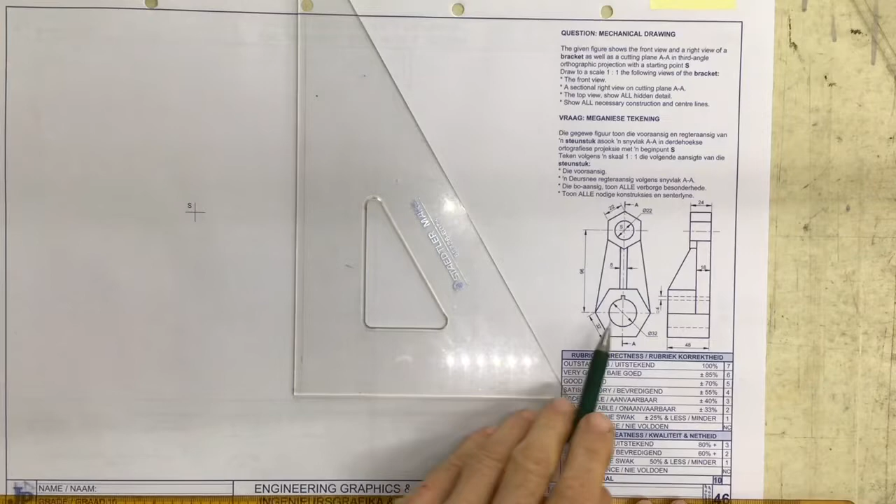We're going to draw the third angle orthographic projection. They've given me a front view and a right view, and they're asking me for a front view, a sectional right view, and a top view showing all the hidden detail.

To start with, always start with the views that have the hexagons and the circles, and then you can project across very easily. So I start out with this circle over here. Let's just draw that in.

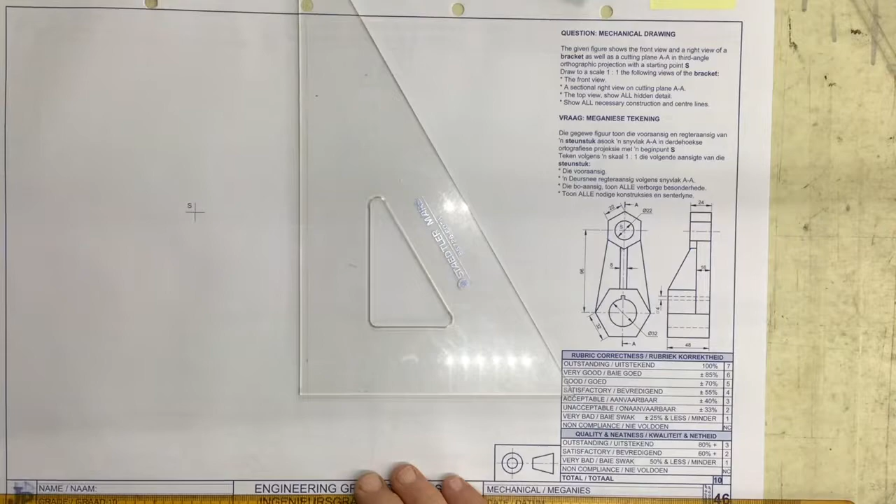It says it's got a diameter of 22. You've got a decent circle stencil. Find that 22 on the decent circle stencil.

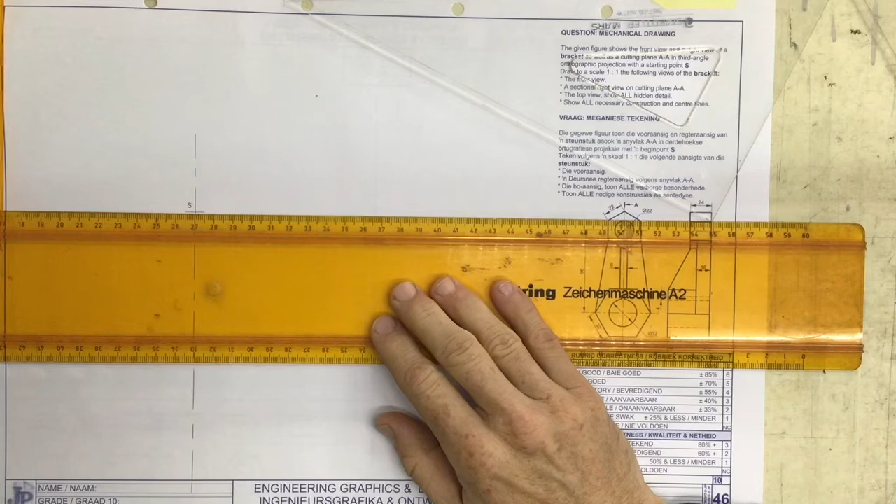You're going to draw in some center lines to start with: long dash, short dash, repeating across. And you're going to come up here to that point S and draw the same long dash, short dash pattern going across there.

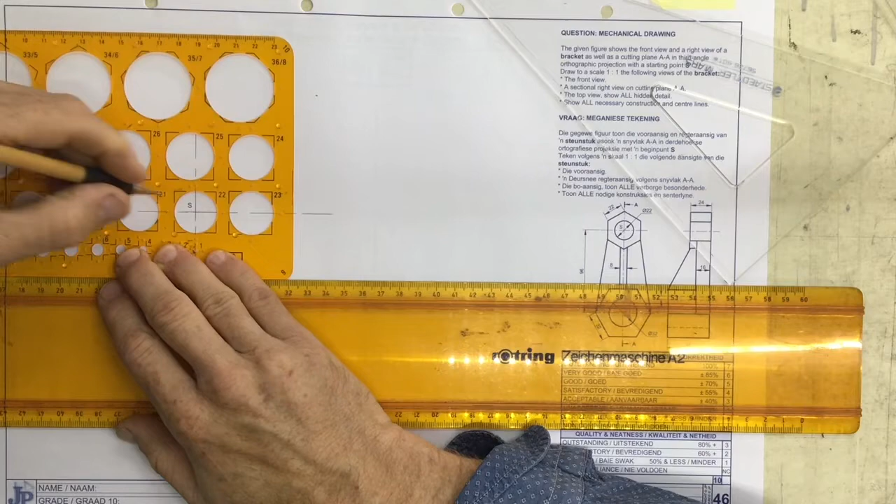You can take your circle stencil now with a diameter of 22, line it up on the center lines, and draw that in very nice and dark straight away. There's 22, and there we go. Circle done.

Right, so the next thing we're going to do is draw that hexagon around there. It says it's got a side length of 22. So I take my pair of compasses, set them to a radius of 22, and draw a circle, just a construction line circle going around.

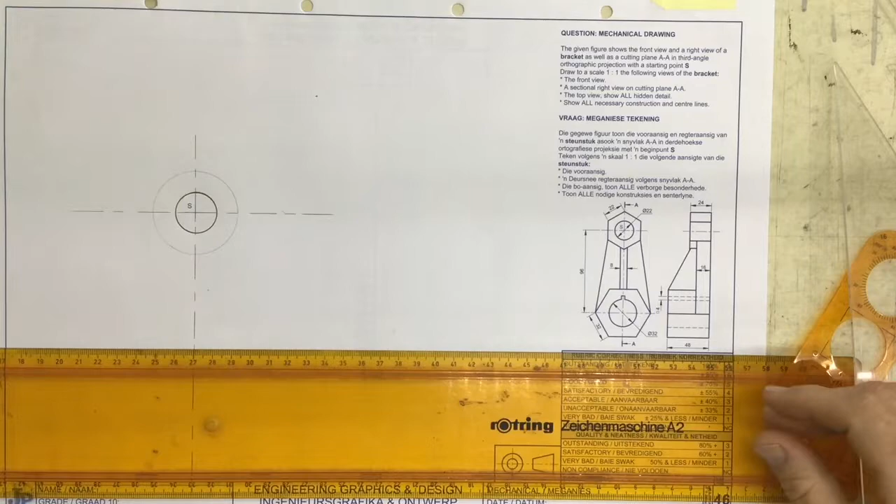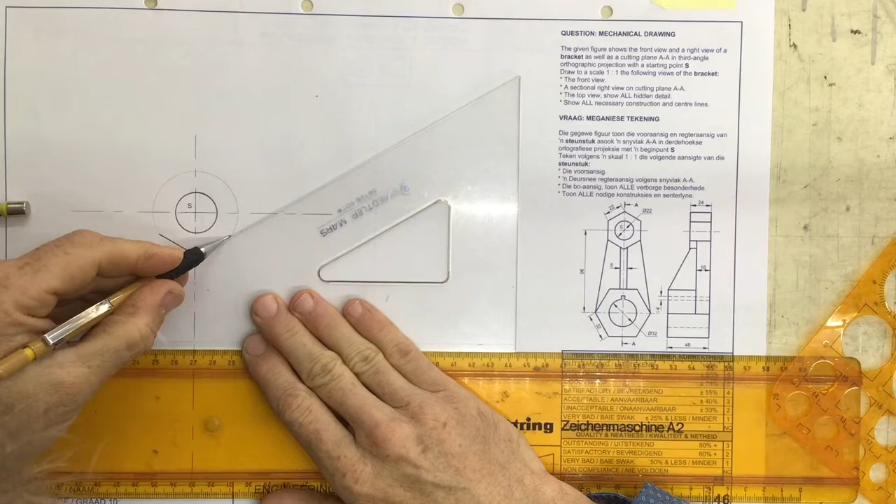Once I've got that in place, I take my 30-degree set square, go to that point where the center line is going through the circle, line the set square up there, draw a line coming across, swing it round, go in the opposite direction, go vertical up to the circle on both sides, and go up to the top, lining it up on that point there going up to the center line, and the same story in this direction.

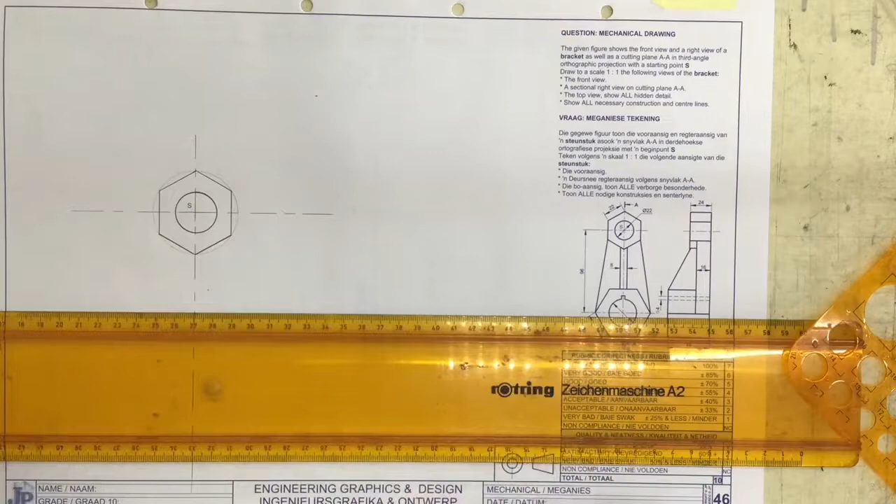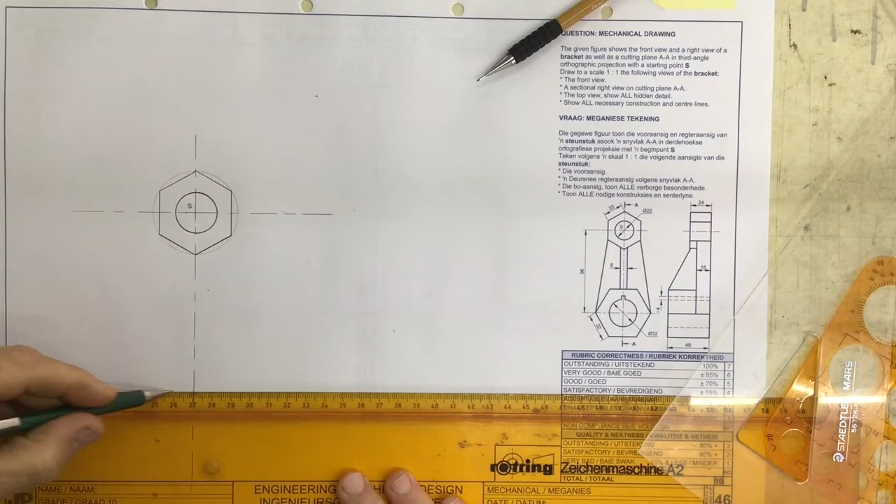I then need to figure out the distance between the center over here and there. That is 96. So I set my pair of dividers to 96 millimeters, come to the center, mark it off over there, and draw your center line going across: long dash, short dash, repeating across.

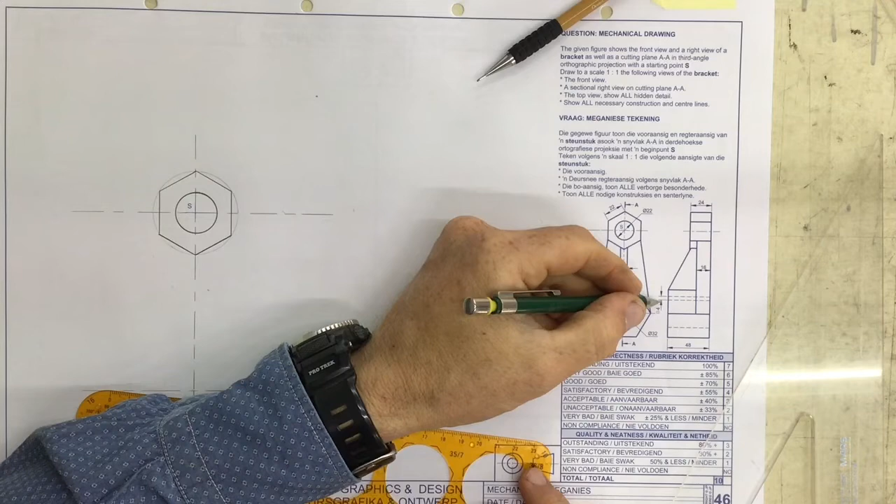I can now start by drawing this little circle over here. It says diameter of 32. Yes, I do have a 32 on my circle stencil. Note it has this little hiccup, which is a square keyway that I need to draw in.

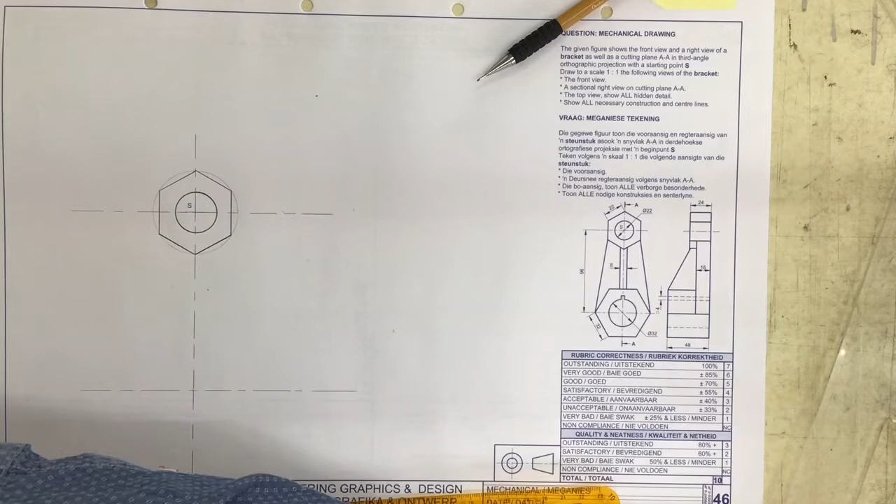So what I need to do is figure out where that keyway is going. It's going to go on top of that circle. I'm going to draw very lightly a construction line circle with my pair of compasses. 32, that would be 16. I'm going to go to that center over there and draw a light construction line circle going around.

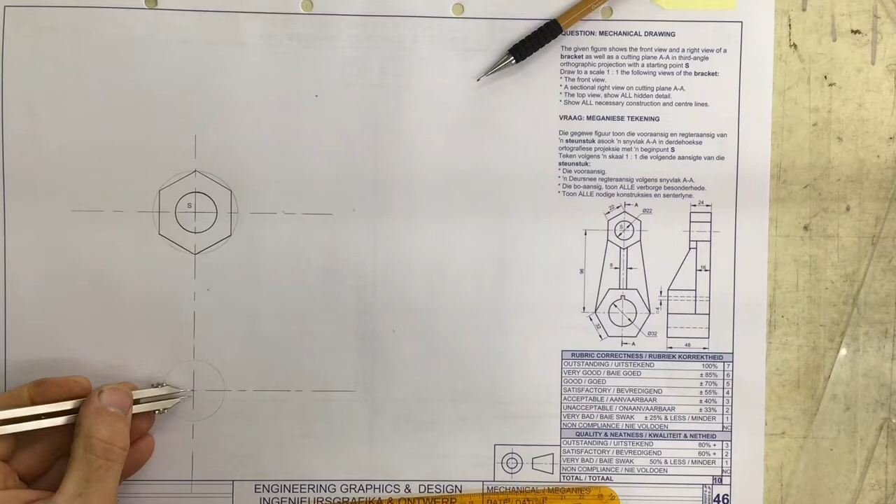I then need to measure off 4 millimeters, which would be at a 2 millimeter distance. I'm going to measure 2 millimeters over here, 2 millimeters going down. Sorry, that was a bit of a vicious thing. Okay, there we go. Take my set square.

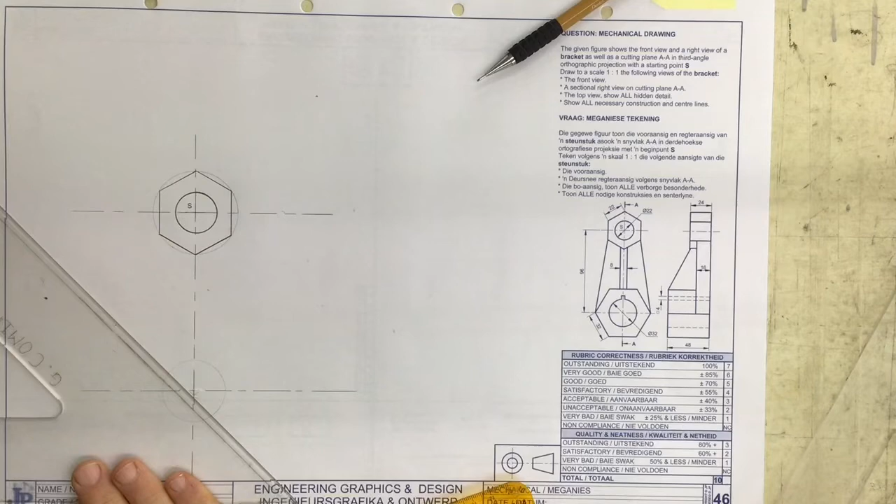I'm going to draw a little line going out at 45 degrees here, a little line going out at 45 degrees there, and then draw two lines going up, and you can see that you'll get that gap perfectly on either side of that line. Right, there we go.

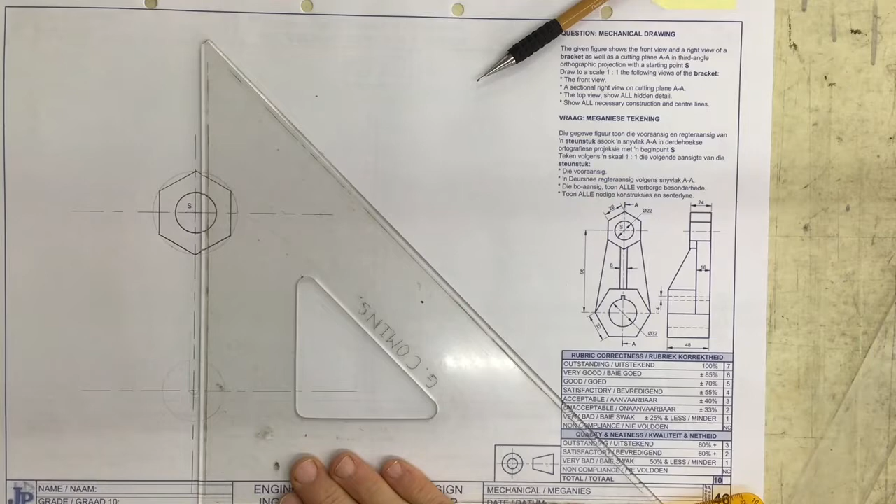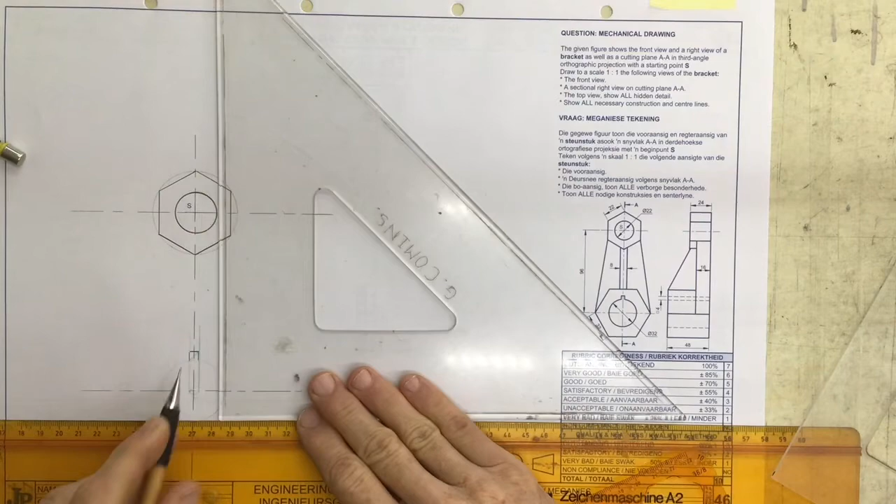Take that, drop that down over there, drop that down over there, and there's my 4 millimeter keyway in there. Once I've got that, set your 32 millimeter diameter circle stencil up on this thing.

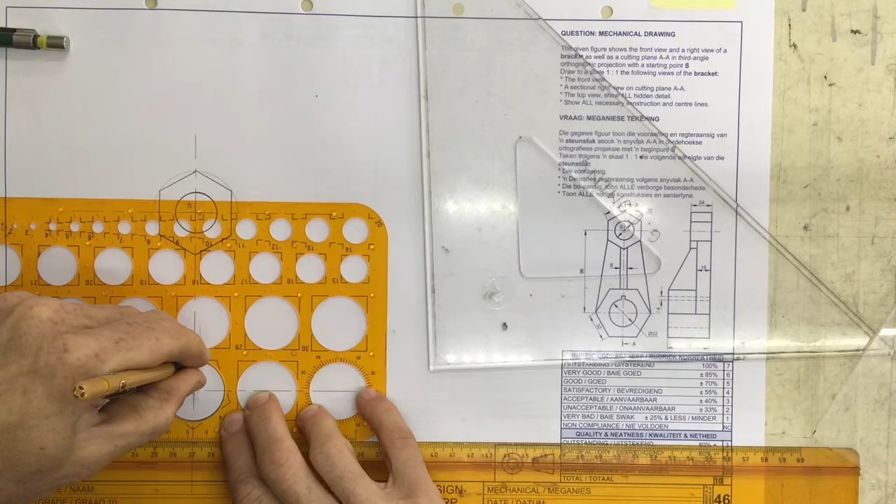There it is. Line that up perfectly and draw in your circle, obviously going from the keyway, around like that, to the keyway. Right, that's done. I need that hexagon done over here.

It's a radius of 32 because the line length is 32. Take that, measure off 32 millimeters on a radius, and just draw in another construction line circle over here.

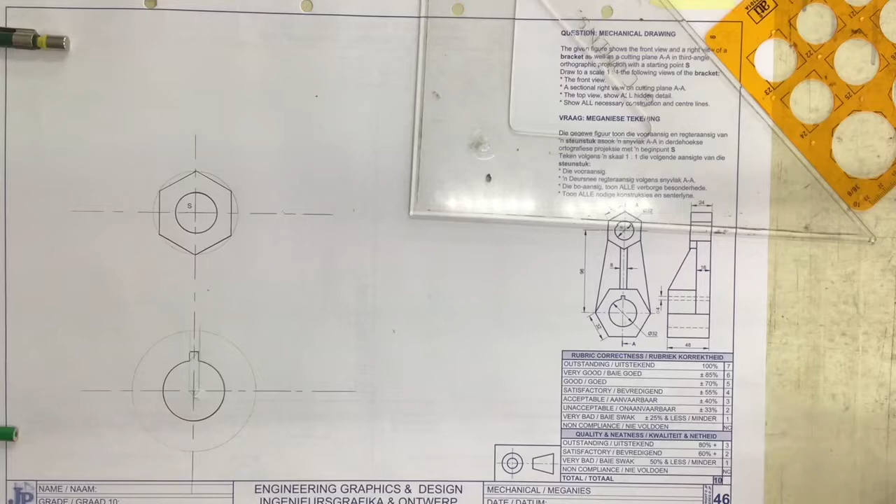Take your set square. Over here, I'm going to take the 60 degree angle going down like that, 60 degree angle over there, and take the 60 degree angle going up over here.

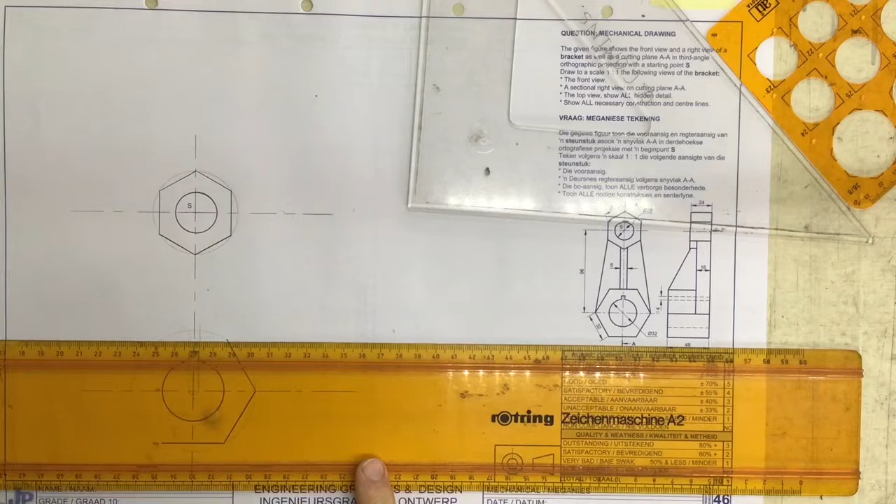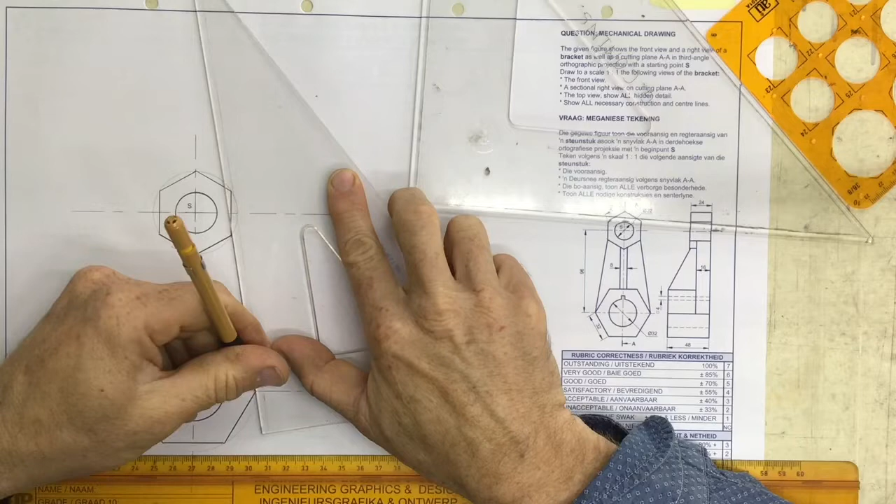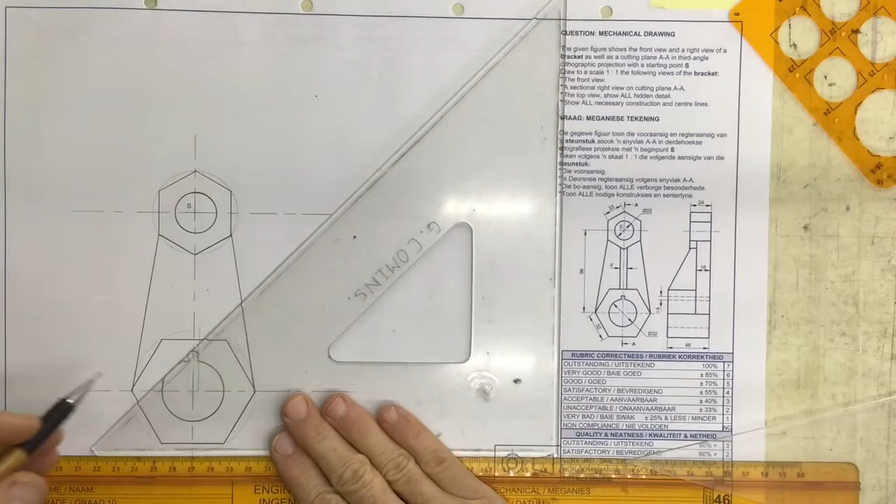So I'm going to measure 4 millimeters, I'm going to measure that down on the center line over there, take my set square, draw a little construction line going out like that, and a construction line going out.

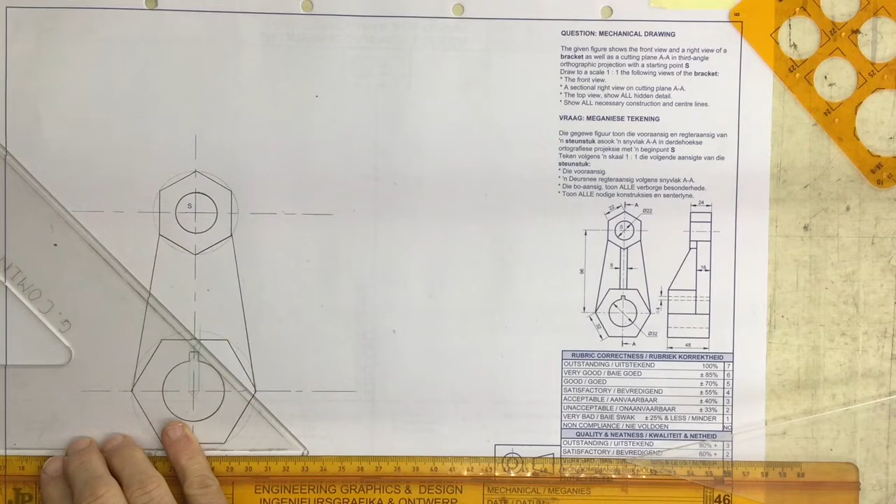Sorry, 8 millimeters it said. No, sorry, being stupid, or am I? I'm being very silly here. Sorry.

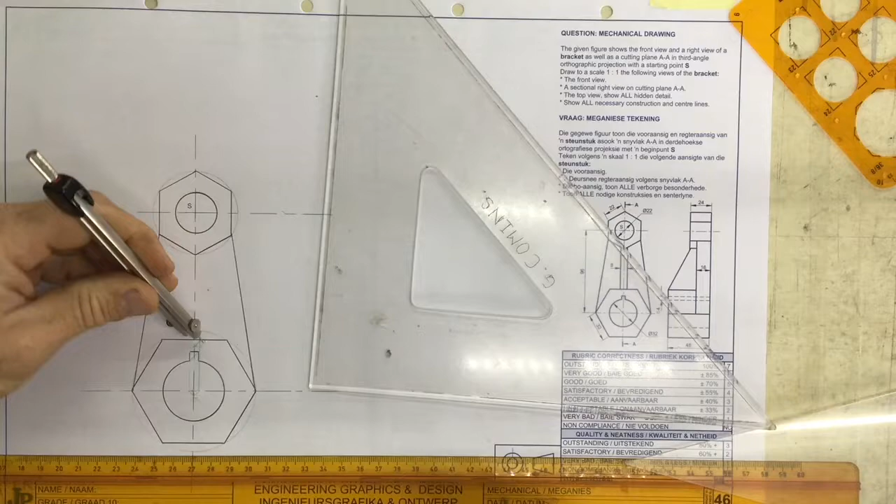Just measure 4 millimeters on either side. 4 millimeters on either side over here. 4 millimeters there, swing it around, 4 millimeters there, and draw 2 lines going straight up over here. There we go, move that across. There's your 8 millimeter on either side of that center line.

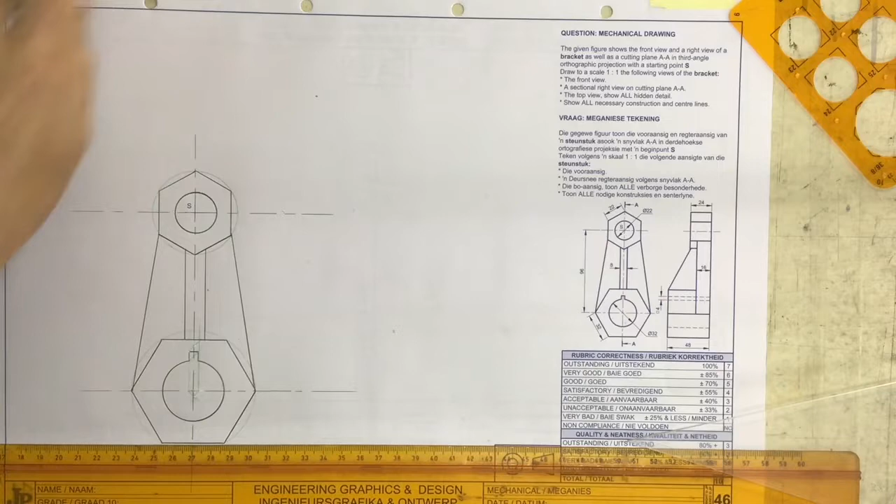Once you've got that, now you can project across in order to find your right view, just taking some construction lines coming across from everything that you're seeing over here.

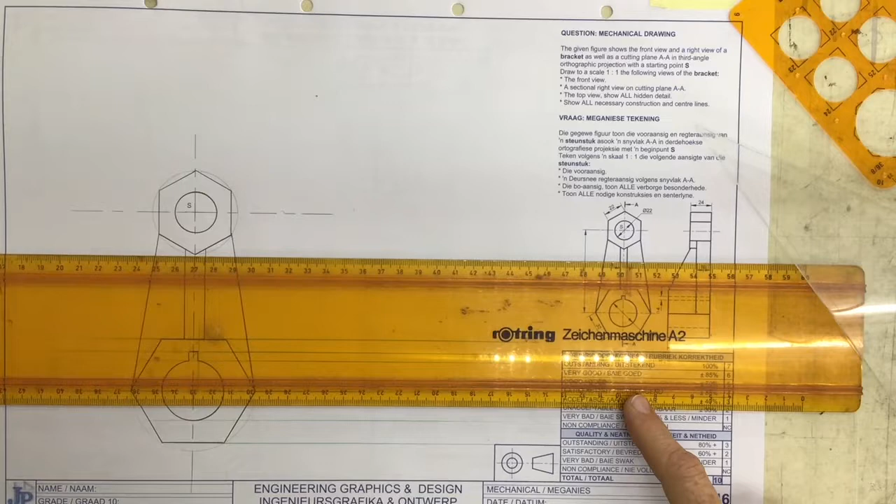Top of the keyway, the hexagon, hexagon there, from the hexagon over there, from the hole again, from the hexagon, from the top of the hexagon.

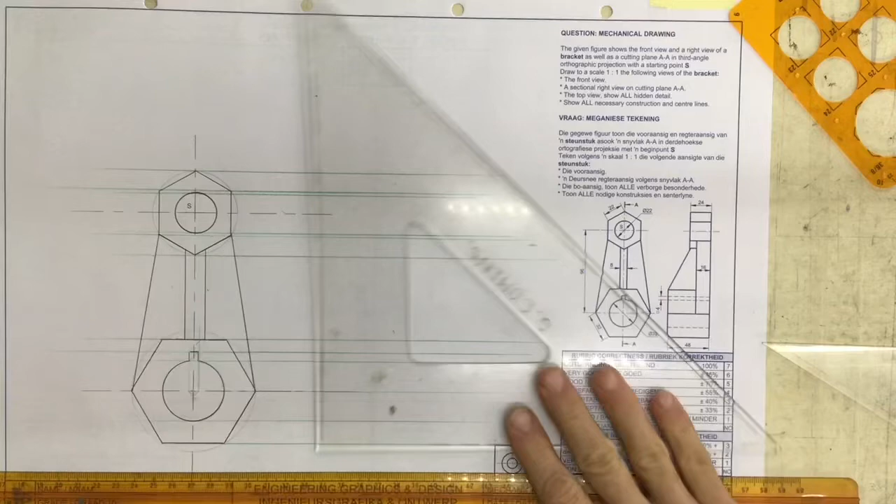Going to come over here, and I'm going to start out by drawing a line which is doing basically this hexagonal part over here. You can see that links up over there with the top and the bottom. So I'm going to come about 20 millimeters away from here, and draw in a line going straight up there. That's no issues.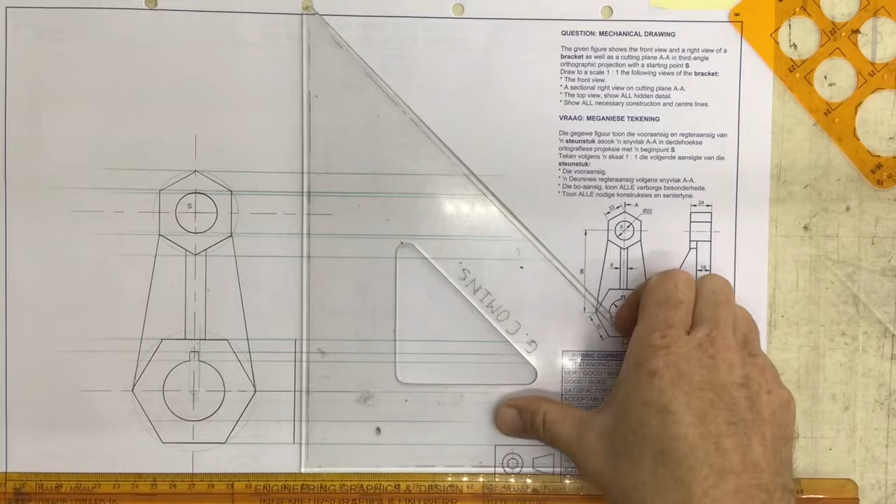I can measure off 46 millimeters, as fast as I can. Knock that in there, draw this across over here to that point. 46 millimeters across, it then goes right up to the top. Draw that line coming all the way down over there.

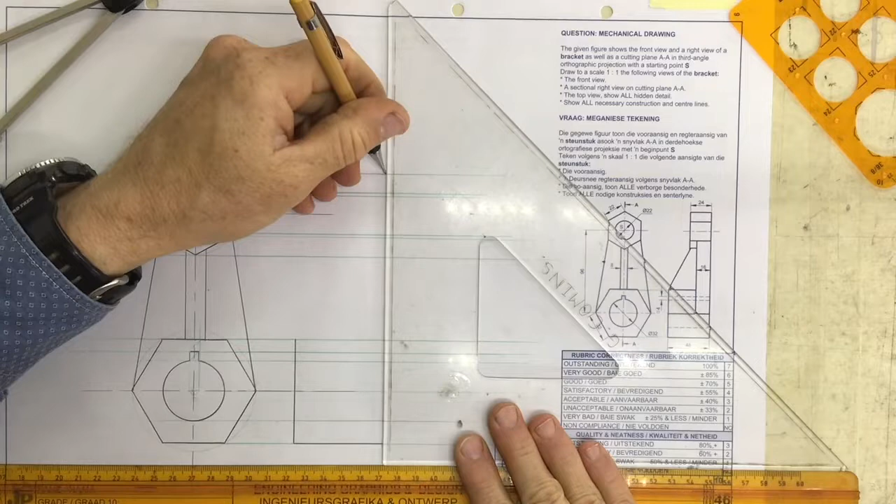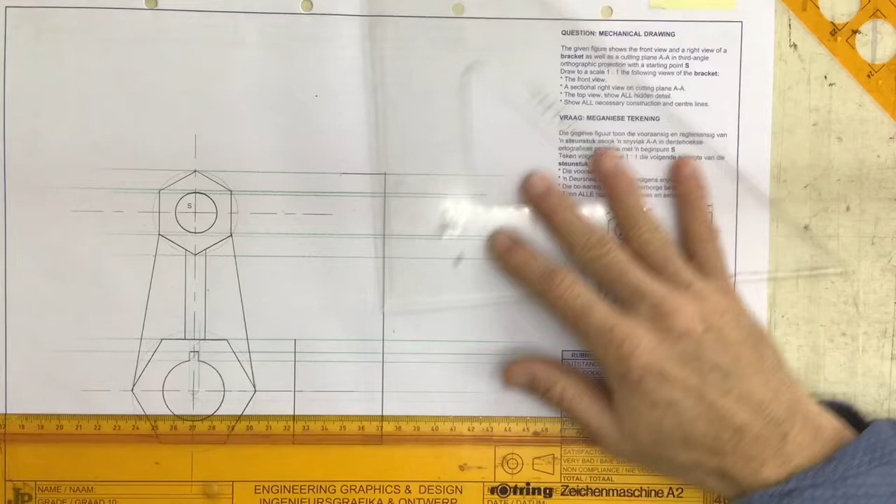Then it says that I've got 24 millimeters at the top there, so I measure off 24 millimeters, knock that in over there, draw a line coming across over there, where the 24 is. That then goes all the way down to the bottom of that hexagon at the top, so I'm going to draw a line coming all the way down to the bottom over there.

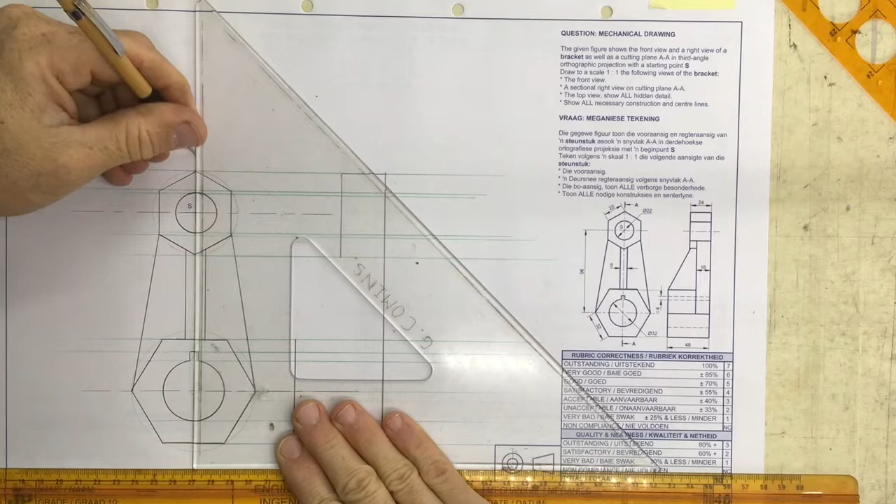Once I've got that in place, I need to draw in the hole. That hole, remember, I've got a sectional view, I'm just going to do that quickly. I'm going to draw a nice dark line over there, and put in my little arrowhead with an A on it, and an arrow over here touching that thick line. Remember, it must touch. Nice thin arrow over there.

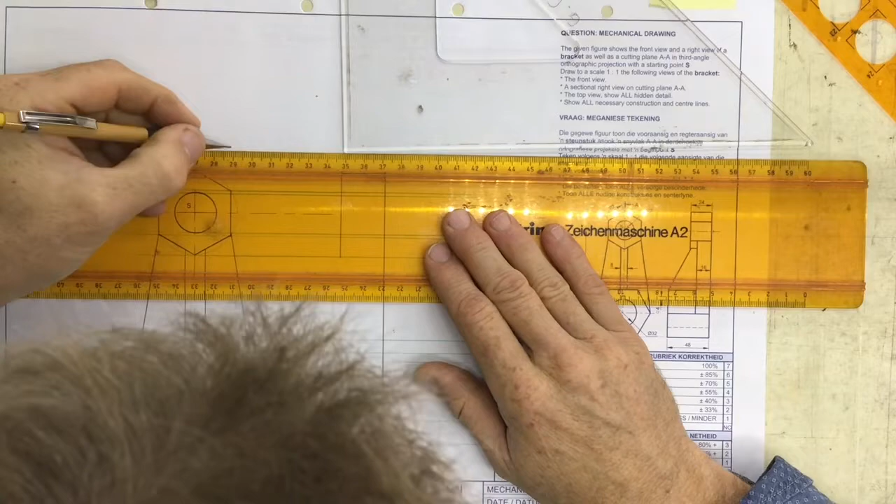Go up to the top over here, line coming out, A, and an arrowhead on that as well. You can write in at the bottom over here that this is section AA.

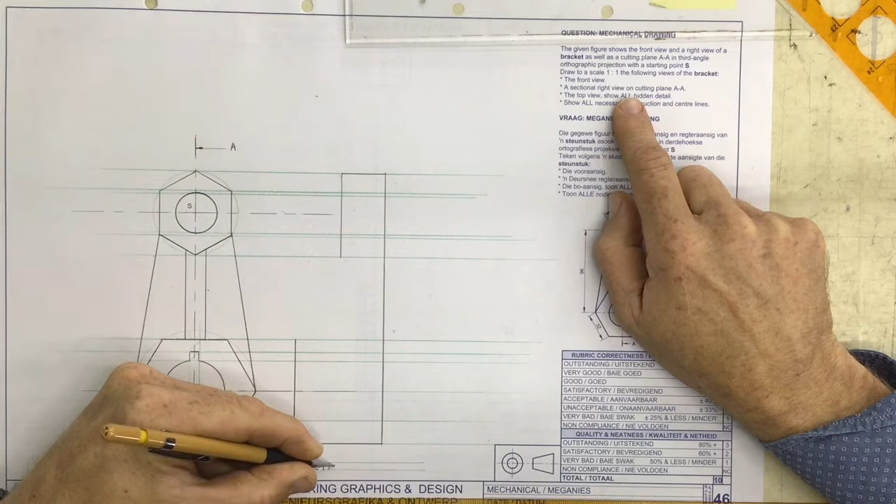Let's see what they ask you to do. Sectional right view on cutting plane AA. Section, S E C T I O N, A dash A. Okay, since I'm cutting through it, you can see the cutting plane cutting down there.

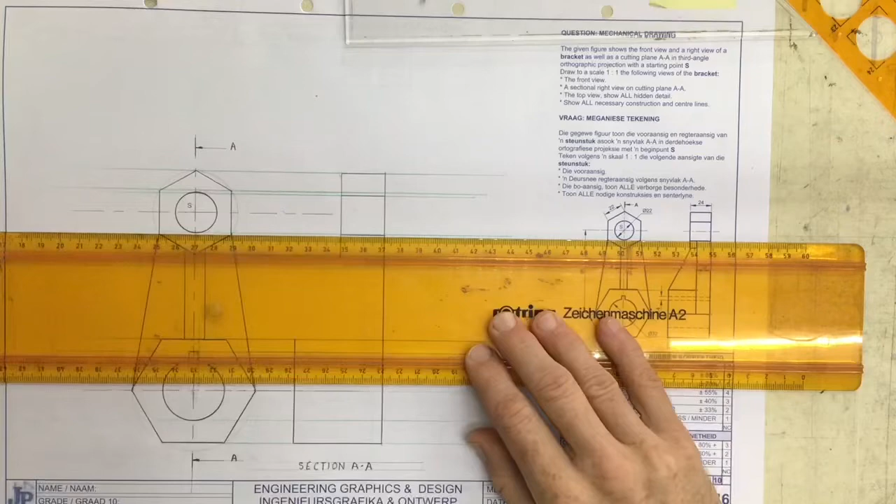Goes through that hole, which means that I've got a dark line where that hole is. Coming down, going to draw a dark line where that hole is. Coming down, I've got a line that's going to come across to this thing which is 16 millimeters wide.

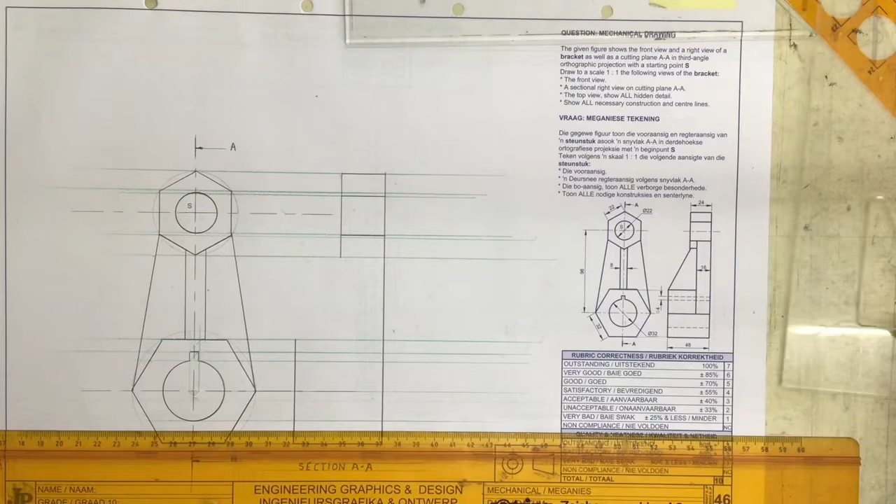Let's just check that. Right, I've got a measurement to make over here, 16 millimeters. Knock that in over here. Draw a line coming up to there. Draw a line coming across from there to there. Draw a line coming across from there to there.

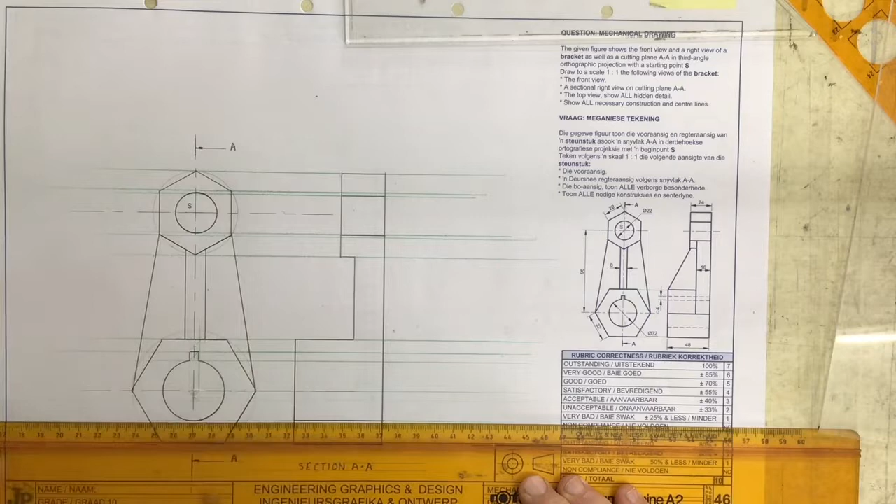And at the end of the day, I can now draw in the hole on this thing, the edge of the keyway, the top of the keyway, and my center lines. Don't forget center lines. Long dash, short dash, long dash going across there. This one, I've got the short dash, long dash over there.

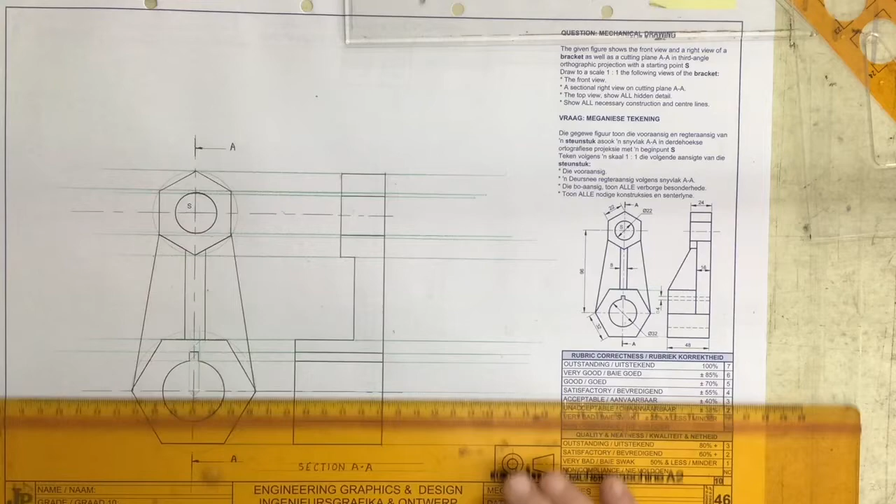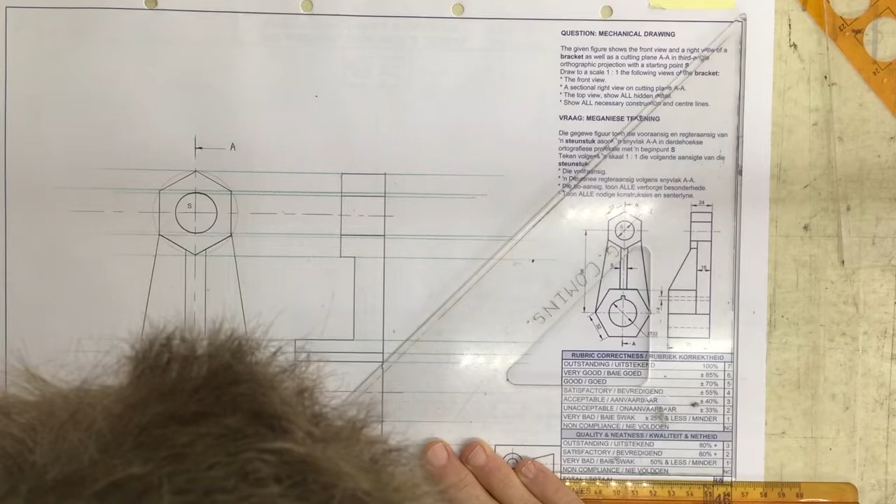Once you've got that, you can start doing some hatching over here quickly. Hatch that part as fast as you can. Note the keyway is two little lines over there. Make sure that you've got those two little lines and there's no hatching going through them.

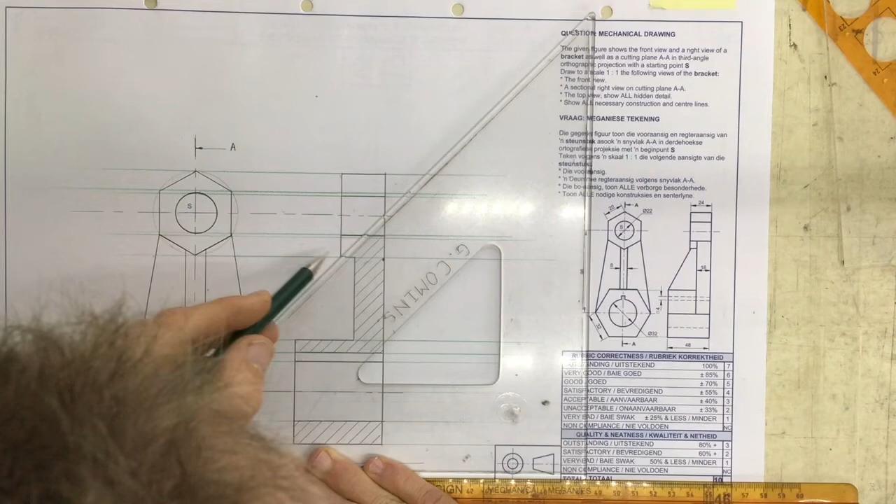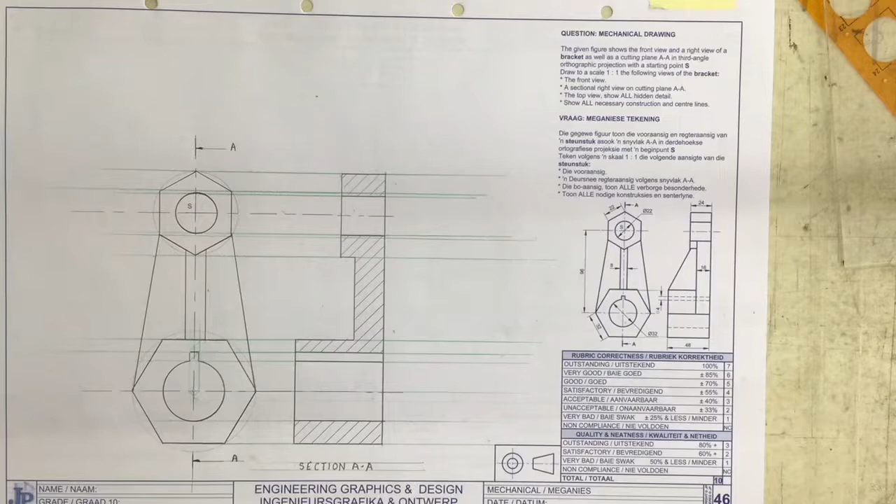There you go, hatching done. Right, now I need to draw the top view of this.

I'm going to come over here. I want my top view to start over there. I'm going to draw a line coming up from this right view over here, touches that corner over there, and I can then draw a 45-degree line coming out from that corner over there.

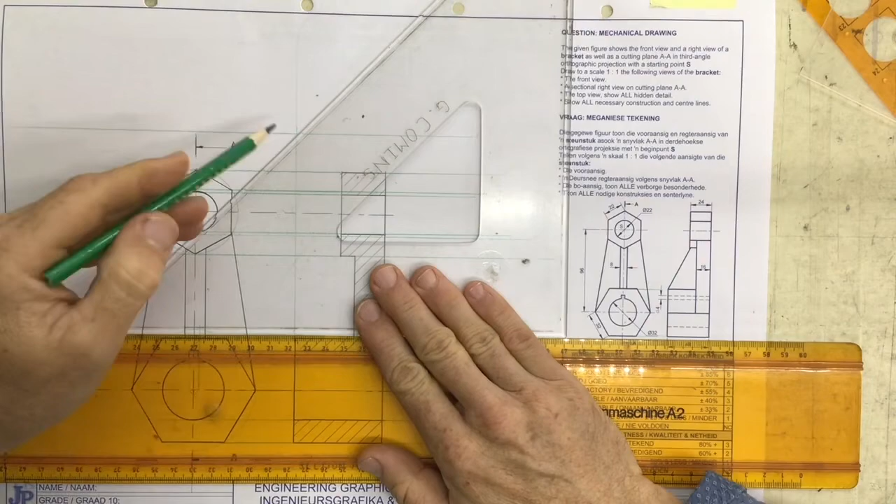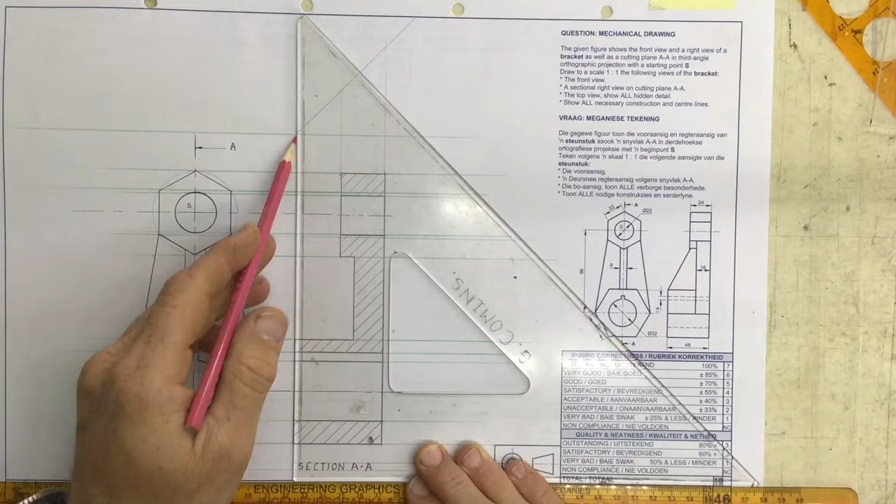Take that line going up over here. Let's just get a different color so you can see this. Line coming up from there to there. Line coming up from there to there. You can see I've already got that line in place.

And I can now take that information across into this drawing over here. Just going to draw lines coming up from that main hexagon over there, going back, going back. Lines coming back from the hexagon over here, the hexagon over here.

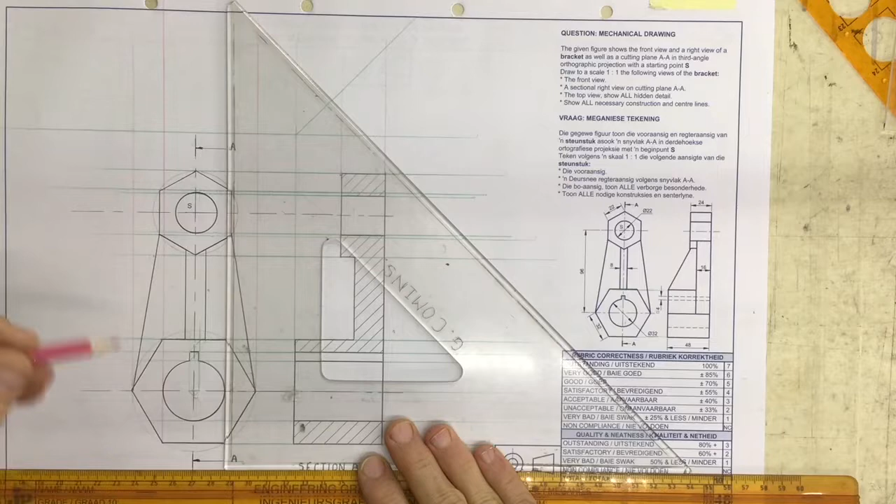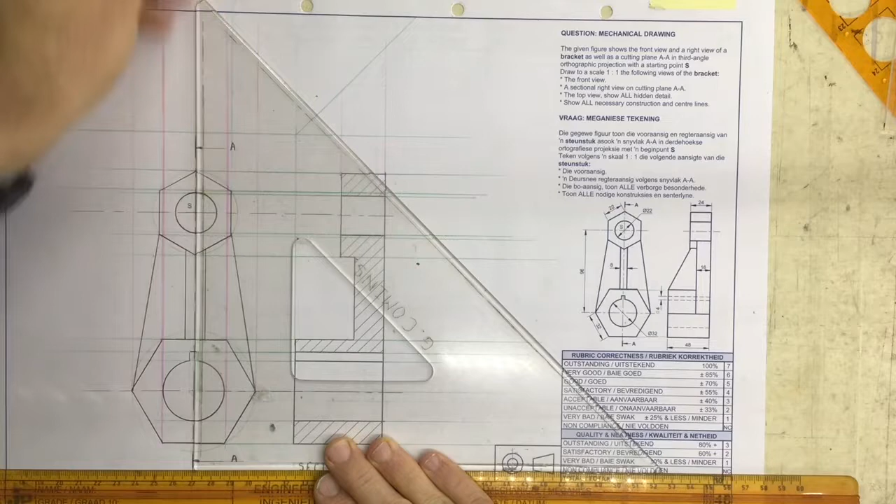It seems that that hole is more or less exactly in the same place as the hexagon, right? Got this top view. Just going to use a different color for that top part. Use red so that you can see the lines coming from this top part over here. There, there, and there.

Right, then I can come over here and I can say, well, the back of this thing is going to be all the way across from intersection of that line coming across from the 45 over there, and I can draw in that line all the way from there to there.

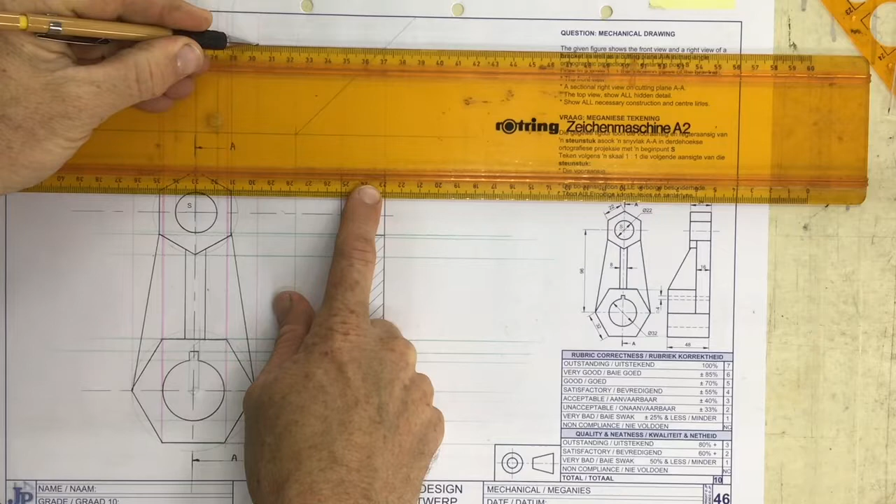I then come forward to the front of this thing over here, draw a line going all the way across from there to there. I can draw a line going all the way back from there to there. I'm going all the way back from there to there.

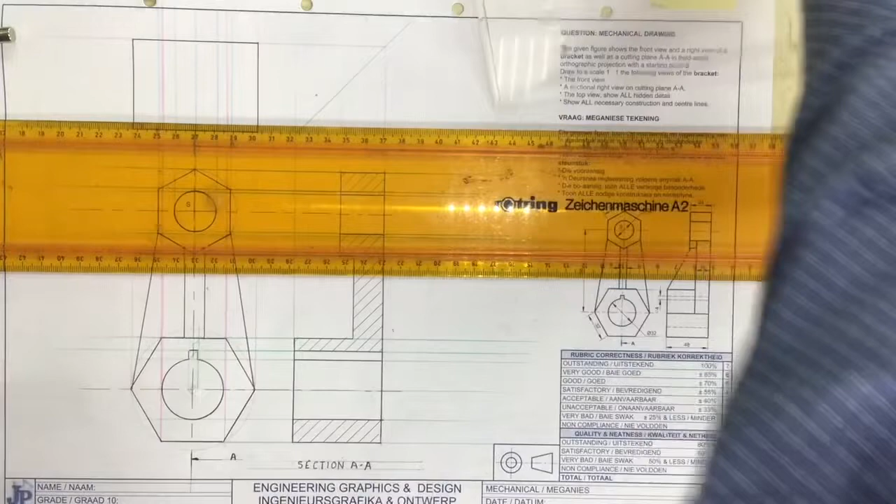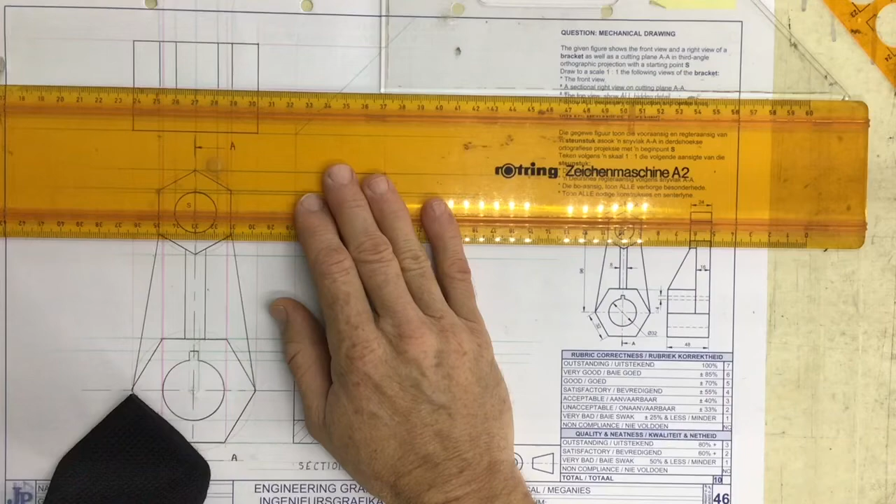This hexagonal part over here, I'm going to take a line coming across from that part over there, and that links up with all that red stuff. So I'm just going to draw a line going over there and going over there. The top lines of that hexagon, there they are, that and that. There we go, that going across there.

It's got a hole inside here. Oh no, sorry, that's meant to be hidden detail. I'm being really silly. There's a line from the top of this hexagon. I'm just going to rub those lines out that I did dark and just redo them in hidden detail. Remember they said that they wanted to see hidden detail being done.

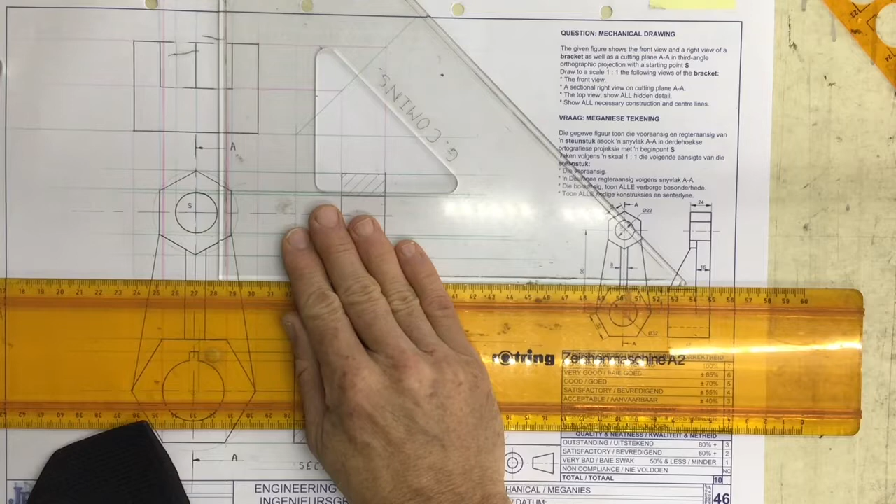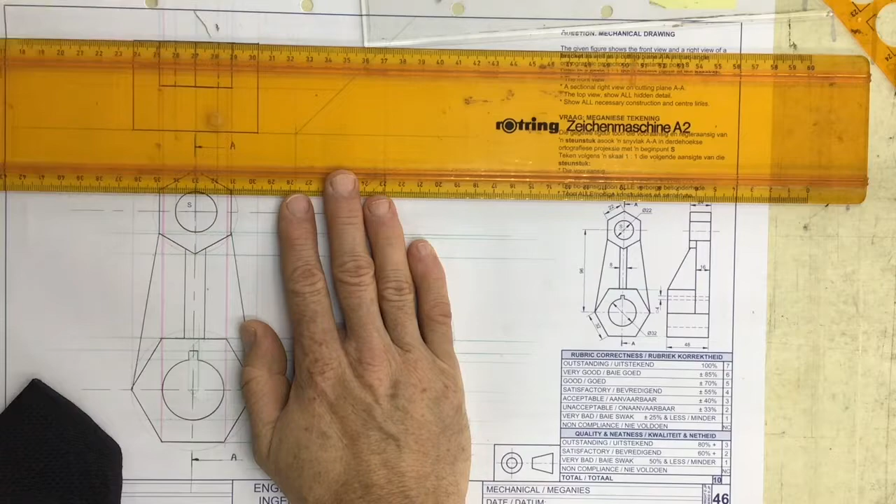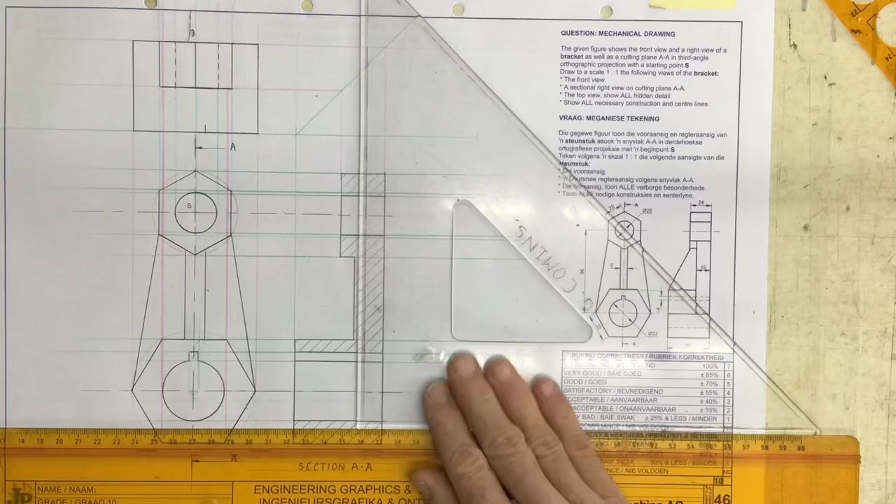Just going to draw in that 16mm thickness part over there, going up to my construction line, my 45-degree line, going across from that 45-degree line, and that web is going to go all the way up to that point over there. So I draw a line going up, and a bit of hidden detail going in there.

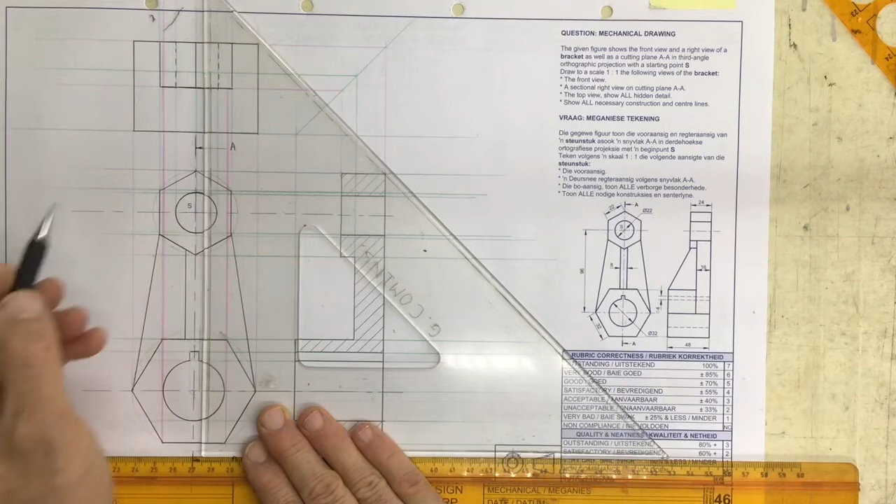A line coming from this web over here, up, and a bit of hidden detail going in there. I now have a line which is going to go, let's just check this, tick, tick, tick, tick, yep, that's right. A line that's going to go all the way there, and it continues as hidden detail up to the web over here. Hidden detail continuing on the other side of the web, and a line going over there.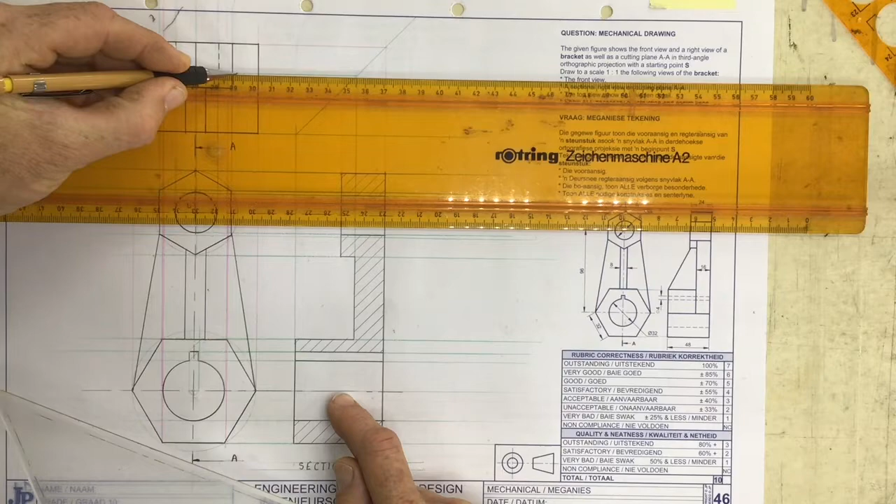Right, I also have a hole which goes all the way through this thing. So I need to put in hidden detail over there, representing the hole, that hole over there, other side of the hole, hidden detail in here.

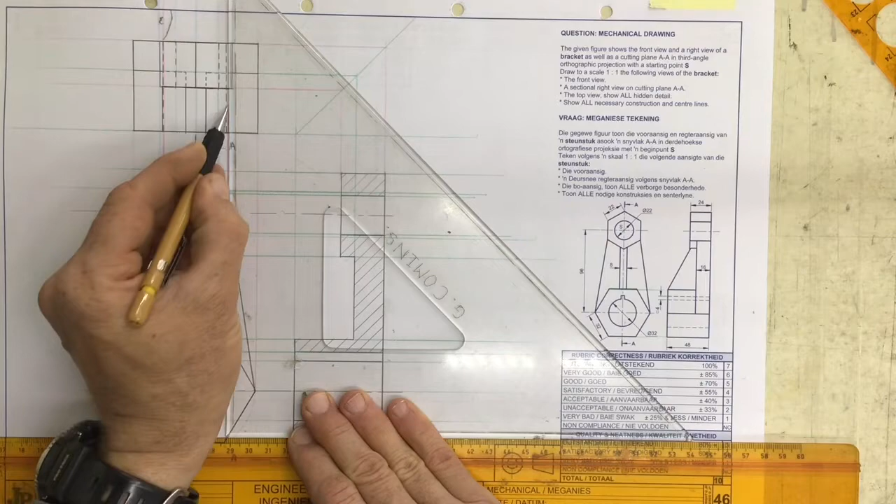Right, and then a dark line for the top of that hexagon, coming across over here, a dark line for the top of the hexagon over there. And I think that is more or less everything, except for a little bit of hidden detail going over here.

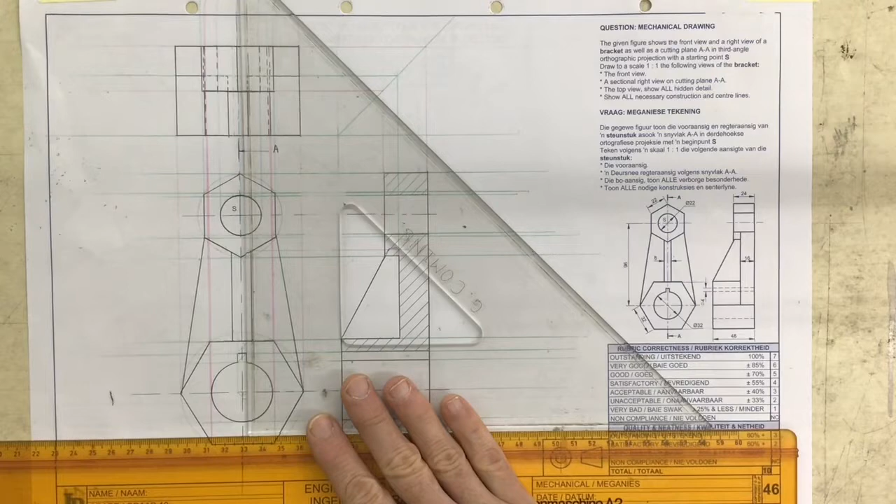So last little lines that I need to do is this keyway over here that needs to be taken up to the top over there. So I take that from the keyway corner over there up onto my top view, and that will be in hidden detail going across from there to the back, and slide it across.

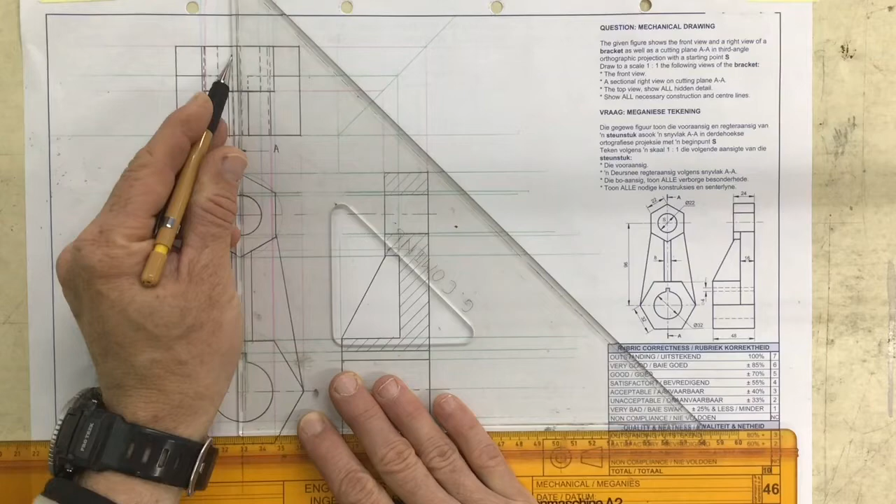There's the other corner of the keyway over there. Take that up and draw that in going to the back. It goes all the way through the object. Right, and that is everything.